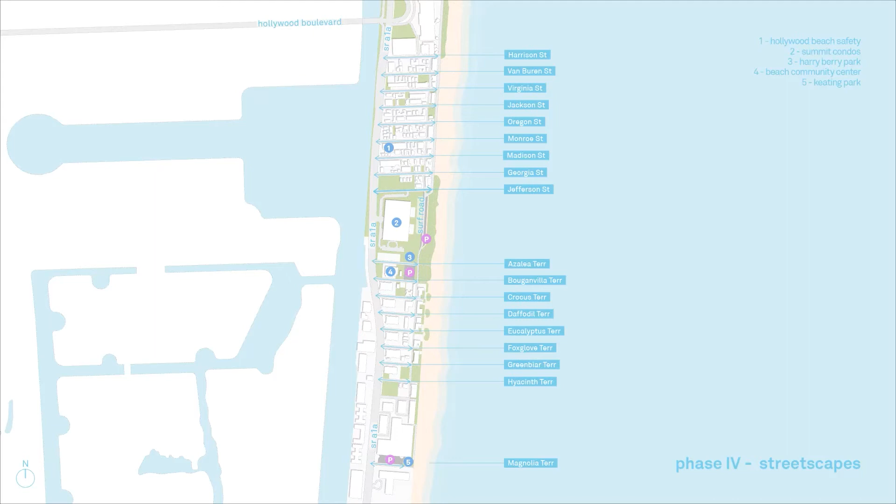In this video, we will be highlighting the upcoming changes occurring on this street during the Phase 4 Undergrounding of Overhead Utilities and Streetscape Beautification project. These images illustrate the existing conditions both at the street and the street end.

The information provided is based on conceptual designs and is subject to minor revisions during the engineering, regulatory, and construction design phase.

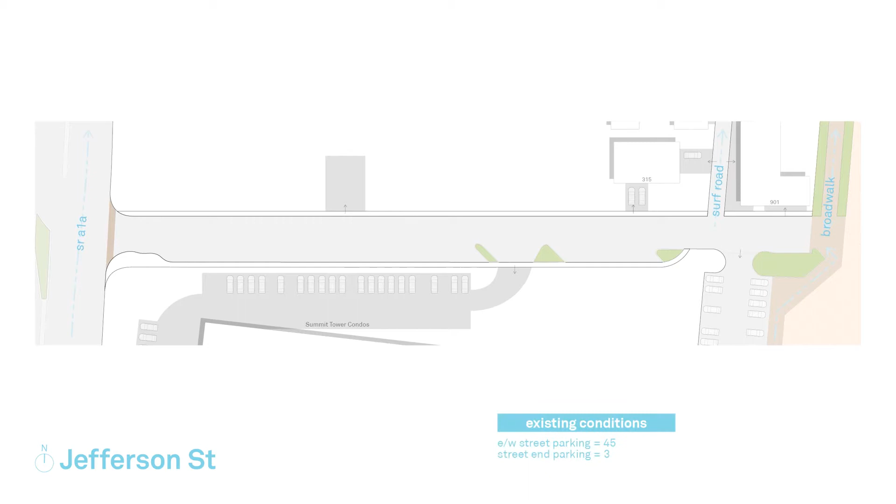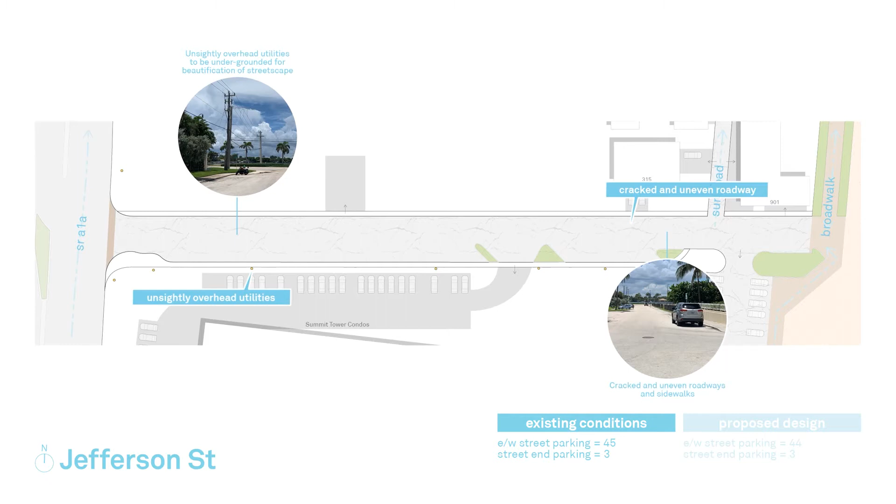Currently on the street, there are unsightly overhead utilities along with damaged patches of asphalt on the roadways and sidewalks. The existing streets are two-way traffic with parking at both sides of the street.

Due to the nature of implementing the undergrounding of overhead utilities and streetscape beautification, the parking spaces, regulatory agency oversight, public lighting, and landscape improvements will be markedly different than the current conditions as seen today.

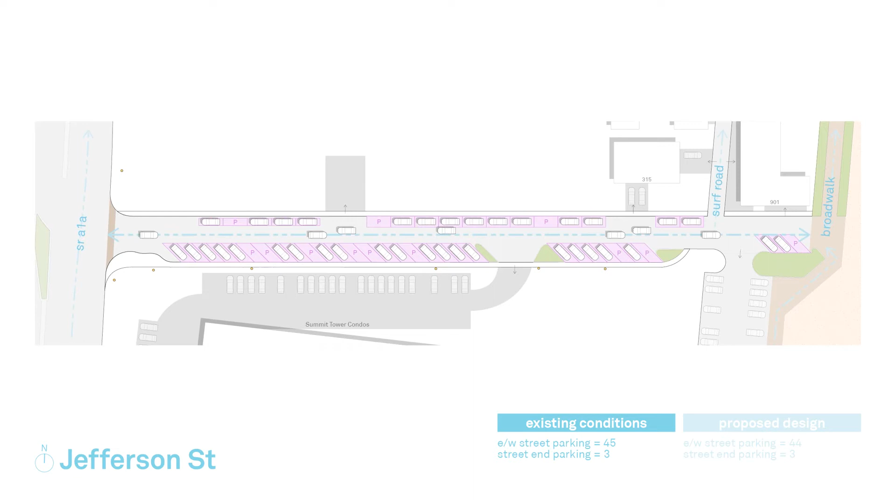Each street is a custom design based on existing conditions. The proposed design will incorporate newly constructed sidewalks and roadways with brand new paving that will extend onto the street end.

The photos shown depict images of the completed streetscape from previous phases 1 through phase 3 and are an example of the same types of lighting, hardscape, landscape, and streetscape improvements that will be implemented on this street and the entire phase 4.

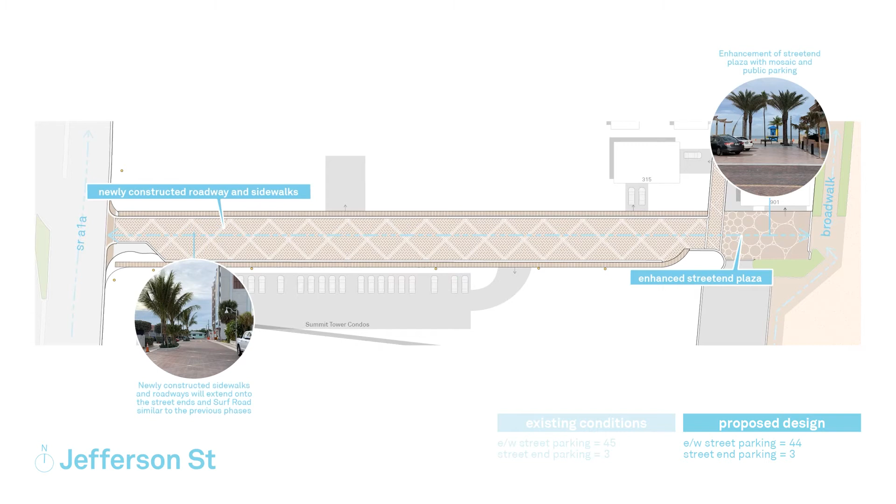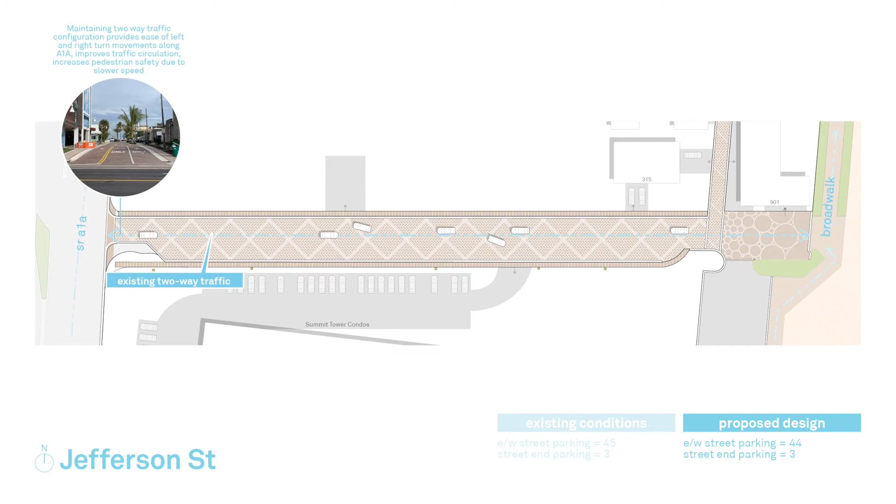As requested by the community, the current traffic pattern is being maintained, i.e., the two-way traffic with a single lane in each direction and parking on both sides of the street.

Existing driveways will act as natural yield spaces, an area where a car can pull into to allow another vehicle to pass by.

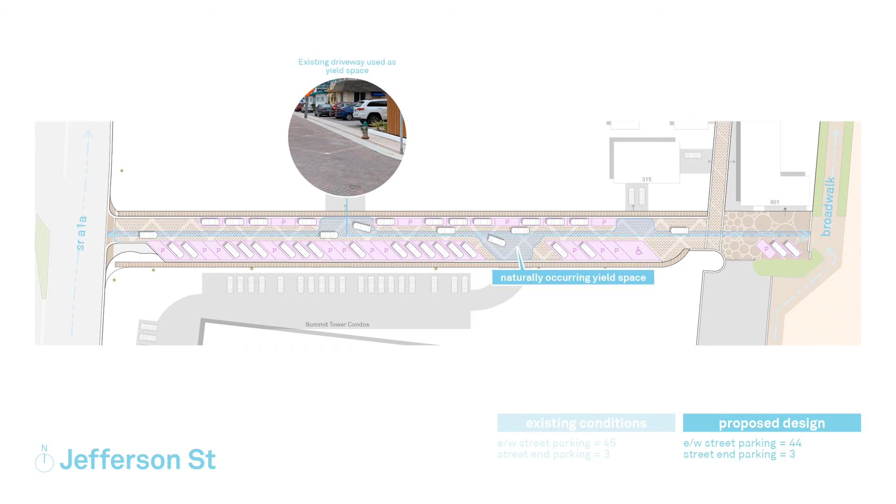Encroachments into the ROW have been addressed by the city passing an ordinance reducing the amount of space required on a private property for parking, i.e., if there is 16 feet and 0 inches in a perpendicular configuration and/or 8 feet 6 inches for a parallel parking space, then these spaces will continue to function as parking on private property.

In addition, if private property owners have wheel stops or small garden walls which can be reconfigured to allow for additional private parking, CRA staff will meet with those private property owners.

The undergrounding of overhead utilities will result in utility transformers that will be placed in strategically located landscape islands to optimize service points to adjacent properties and minimize the loss of public parking spaces.

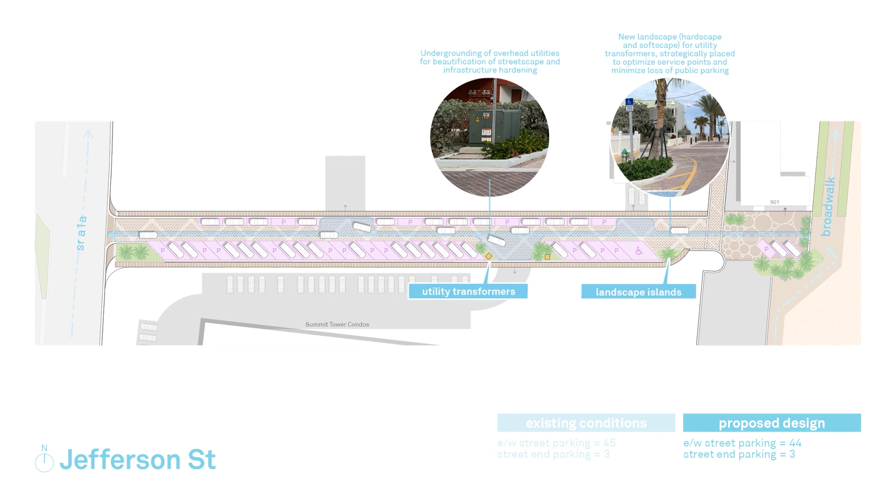Street lighting will also be upgraded to LED marine turtle-friendly lights as seen in the previously completed streetscape projects from Tyler Street to Thomas Street and Iris and Jasmine Terraces.

The design of each street maximizes retaining as many public parking spaces as possible, while dedicating the areas needed for transformers as part of the undergrounding of overhead utilities.

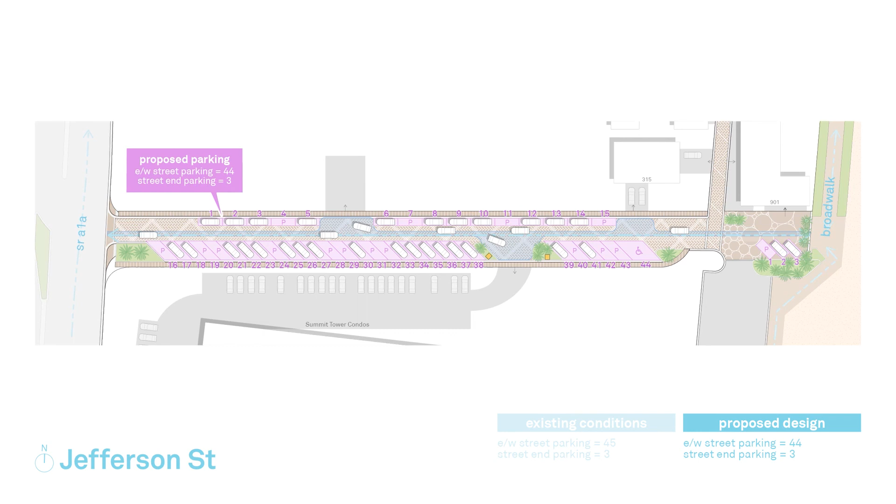For Jefferson Street specifically, Broward County regulations and FPL equipment needs result in a net loss of 1 space along the east-west street.